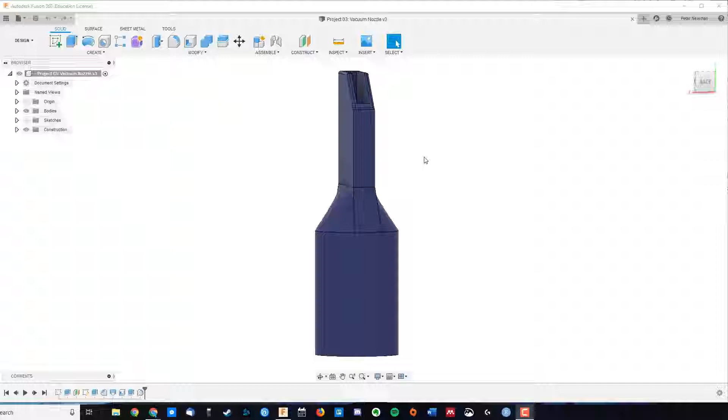Okay, so in this video we're going to tackle our second project, which is going to be a custom vacuum nozzle. It's designed to fit over my Dyson vacuum cleaner, and we can add whatever kind of head we like to it. So let's get started.

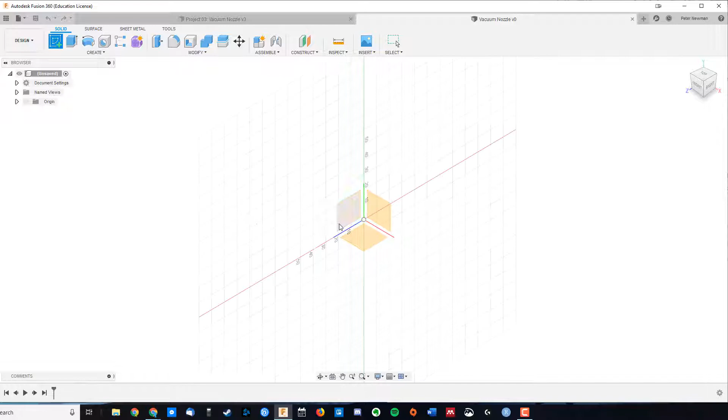I'm going to start a new design. I'm going to save it as vacuum nozzle. And once again, we're going to start by creating a sketch on the bottom plane.

Now, in the last video, we used dimensions. This time, I want to show you an option that is available to you. You can come up to Modify, and we're going to go Change Parameters. Now, user parameters are like global variables that we can use throughout our design.

So we're going to come up here, name it vacuum nozzle diameter, and my vacuum nozzle is 32 mil. You can use this variable as many times as you like in your design and change it once, and it'll propagate those changes, if possible, all the way through.

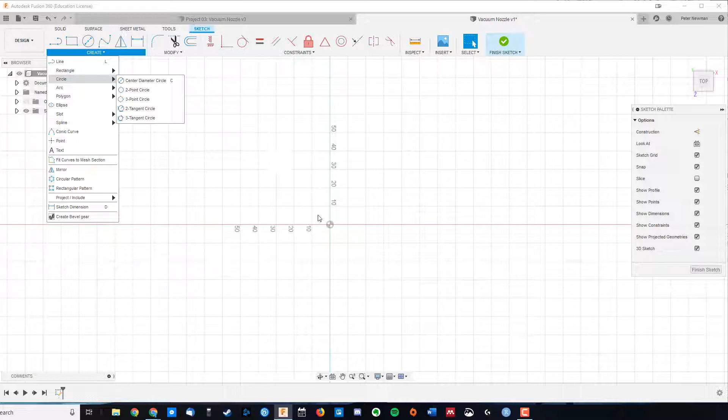To get that profile, I'm going to go Create, Circle, Center Diameter Circle, which means C, and I'm going to type vacuum nozzle diameter, it autofills for me, press enter, and there it is. You can see now that's a function.

The other thing you can use parameters for is setting dimensions according to some formula. Right now, if I were to make my nozzle exactly 32 mil, then I would have to rely on the printer being 100% accurate. Now we know that's not true, so what we're going to do is add some tolerance.

I'm going to come up here, because I might use this a couple of times. I'm going to add some more parameters, and I'm going to say tolerance. Now on my printer, I know that if I do a tolerance of 0.2 mil, then I'm going to get quite a tight friction fit. 0.4 mil is starting to get a little bit loose, and anything over that will kind of just slide off. You're going to have to explore things with your printer to work out what kind of tolerance to use.

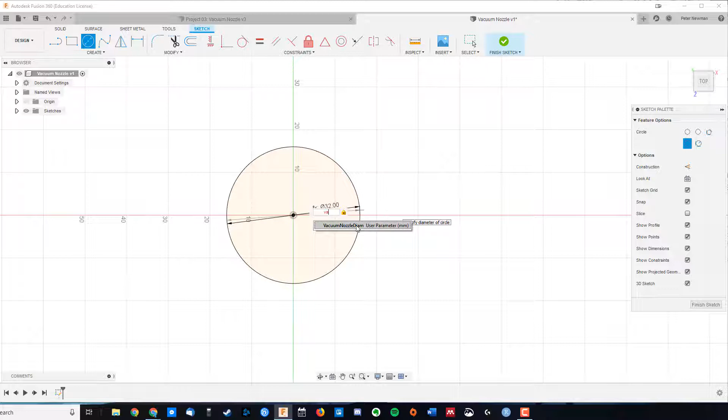You go OK, and once again C for circle, and I'm going to come up here and say vacuum nozzle diameter plus the tolerance.

Now the only reason I've done that is because we're about to use an offset to get some thickness to my walls, but Fusion 360 won't let you do an offset on an offset, right? It wants you to start a new line.

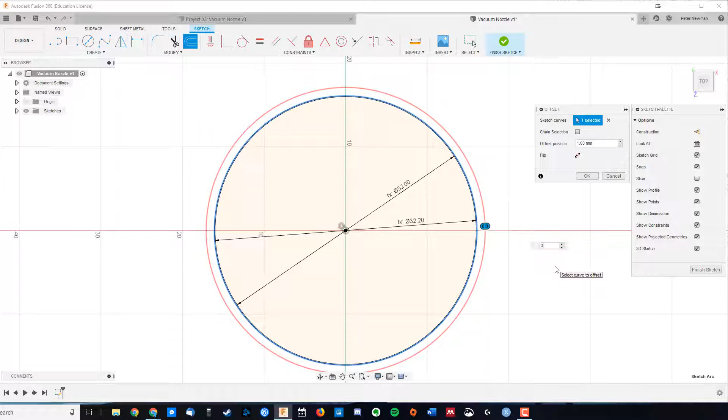So we're going to select our outer line here, offset, and we'll just add 3 mils of thickness because that's nice and strong on my printer.

You go, okay. Now we're about to extrude this, but a handy little tip: if you drag a box up and to the right, only what is completely contained in that box will be selected. Whereas if I drag up and to the left, anything the box touches will be selected.

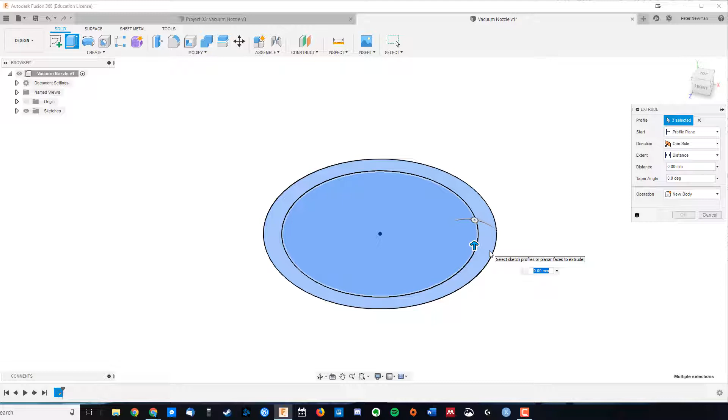Press E for extrude, and we're going to come up to 80 mil. Cool. There it is.

Now you wonder why I haven't made a hollow yet, and that'll become clear very soon. Coming back to my original design, you notice that the top profile is just a rectangle, but it doesn't start from the top of that cylinder, it's actually floating above.

So to do this, we're going to use a thing called a construction plane. Just like we have construction lines, we have construction planes. If I come up to here and construct, we've got an offset plane.

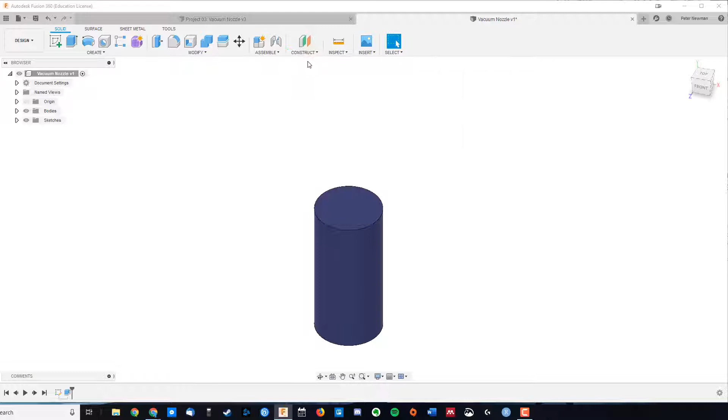I can choose where I offset it from, and that's going to come up by 20 mil. There are lots of different options on how you can do that, which makes it very flexible. So when I create my new sketch for that rectangular profile, I'm going to put it onto that new plane. Even though it looks like I'm drawing onto my cylinder, I am in fact drawing 20 mil above that.

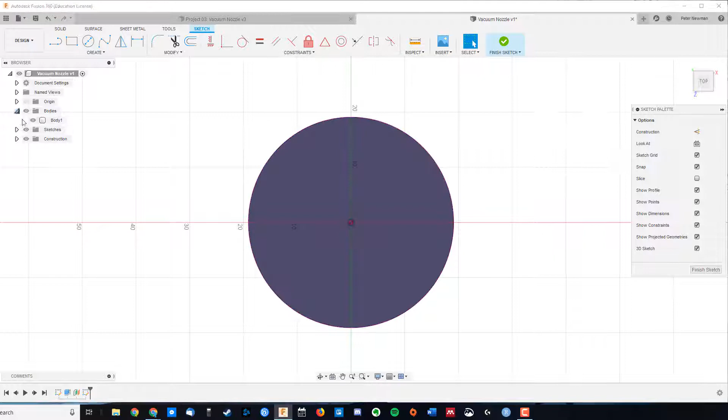I'm going to hit P for project because I want that geometry in there. We'll turn off those bodies, and now I have access to the center point of my circle. So again, create rectangle, center rectangle, and that's going to go out to maybe 30 mil, and we'll say 8 mil. Finish sketch and turn my bodies back on.

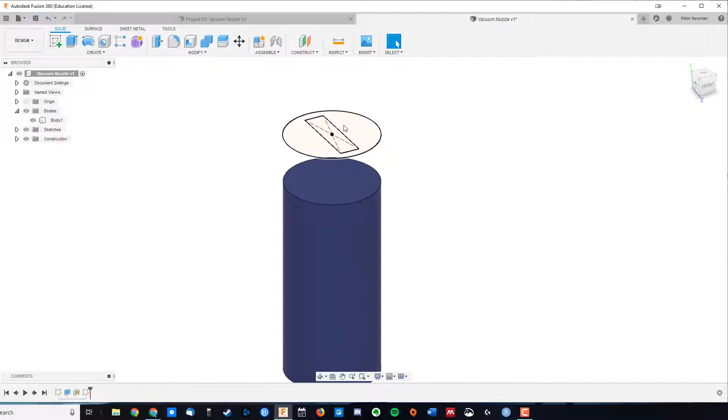So you can see now, if I zoom out, we've got our profile drawn on a plane that is not attached to the cylinder. So now I'm going to hit E for extrude, another 8 centimeters, and I'm going to hit OK.

And we've nearly done. All that remains is to join these two together. You may wonder why I haven't made them hollow already. That's because we're going to join these two bodies using the Loft tool.

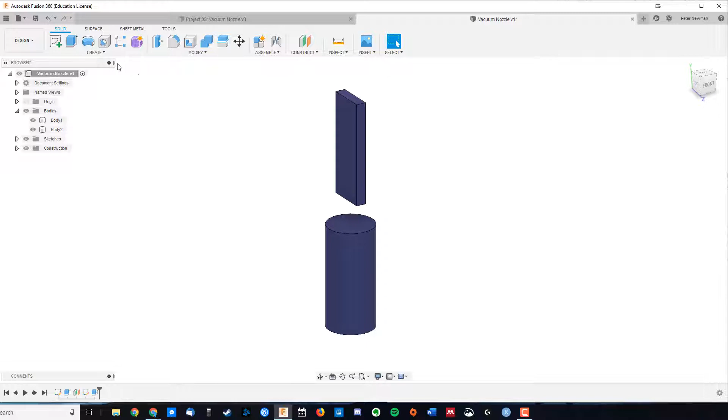It's in our 3D creation menu here, and notice that Loft creates this transitional shape. So I click on Loft, select my two faces, and voila! It has beautifully joined them together.

Fusion 360 is a parametric program that takes some parameters, some constraints, and then optimizes the geometry using some clever maths behind the scenes to give you these beautiful results. So that's looking pretty good.

Now I can hollow it out. What you'll find in Fusion 360 is there's lots of efficient ways of doing things and there's inefficient ways of doing things. We could do an offset through all of this and then hollow it out, but luckily we've got some shortcut tools like, for instance, the shell tool in our modify section.

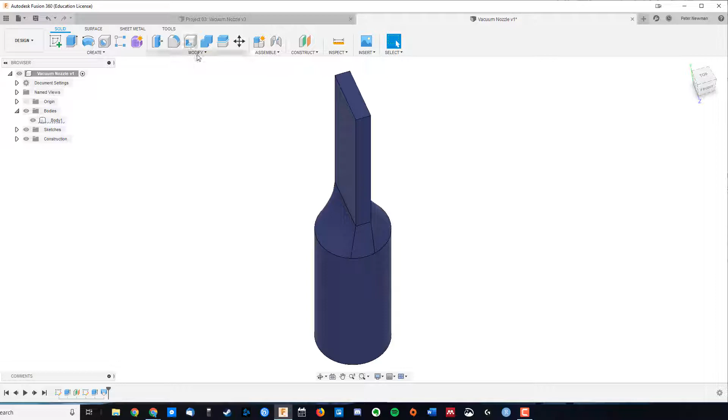So your shell, you select a face, you decide what kind of hole you want to put in it. The inside thickness we want to be 3mm because that will fit our nozzle. Hit OK. Now from the top, you notice it's punched through, but from the bottom it's still closed.

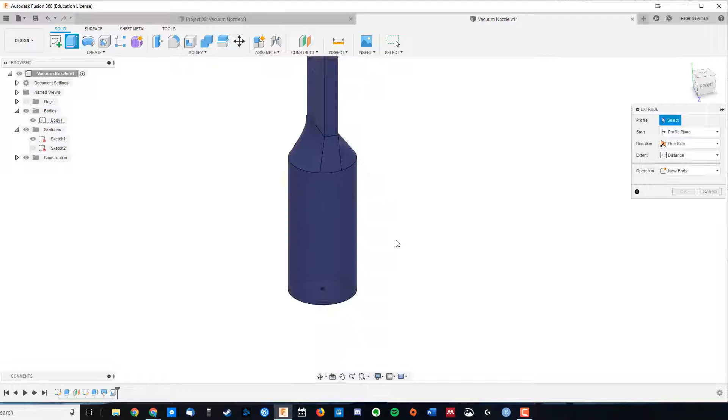That's easy fixed. We're going to go back into our sketches, turn on an original sketch, and just remember the profile we want is not just this one, but also the top. Once again, we can extrude up through the bottom there. Cut. And now it's all hollowed out.

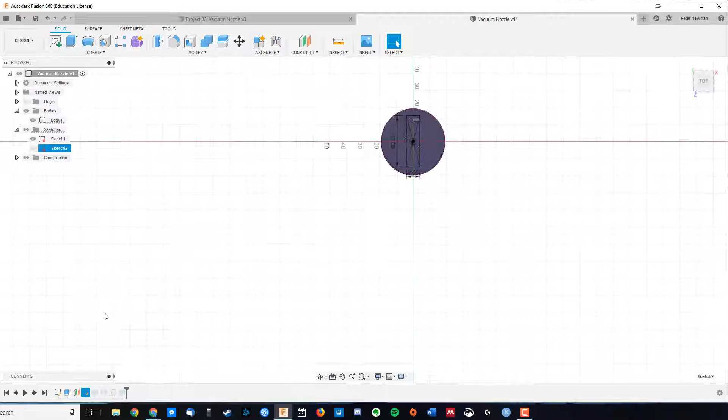Two little minor tweaks. Number one, you'll notice that our hole at the top here got very narrow. Once again, using the timeline, we can go back in, edit sketch, and we can just make this a little bit wider to start with. Let's make it 10mm. Once again, it's updated, so now we have a wider hole at the top there.

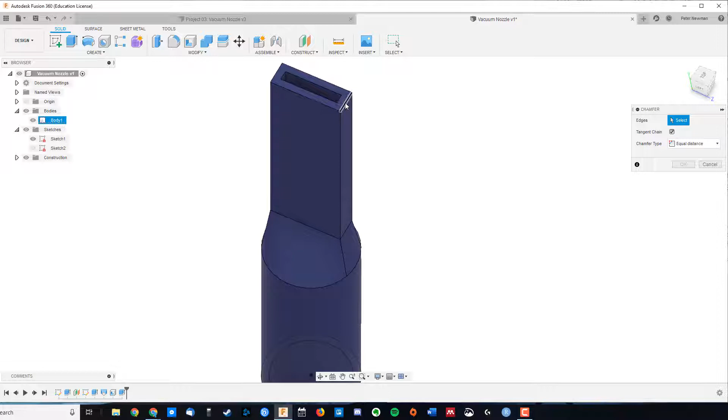The last thing to do is to come over here and notice that we've got this chamfer at the end and a bit of filleting around the edge there. We could do that like we did with our tweezers, or we can come up here, modify, chamfer, and we just choose one of these edges. We'll come in until it looks okay.

Done. And then to add that fillet, F for fillet, and we can select as many edges as you like, and we just add a little fillet there at the end. Congratulations, you've now completed your third project.